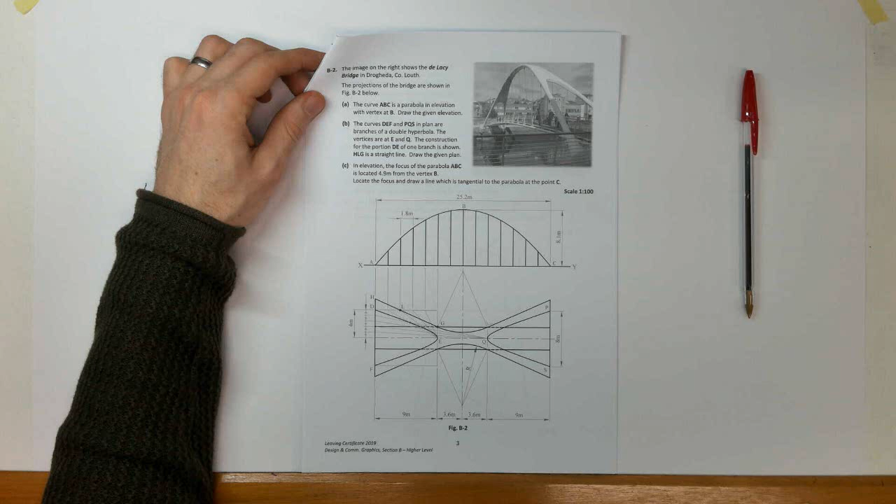Welcome to 2019 higher level, question B2. This is a conics question with links to orthographic projection.

So the image on the right shows the de Lacy Bridge in Drogheda, County Louth. The projections of the bridge are shown here below. The curve ABC is a parabola in elevation with vertex B. Draw the given elevation. Okay, so let's start with that.

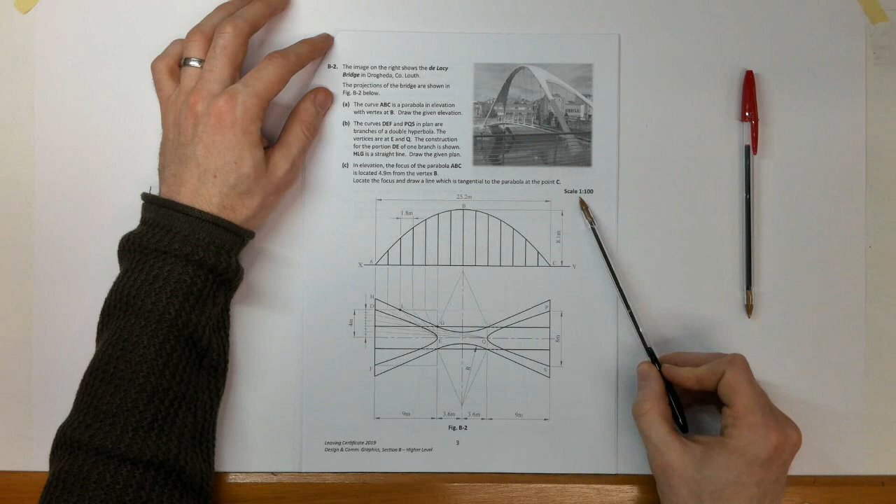All our measurements are given in meters, and we've got scale 1 to 100, so we can convert all of those. And to do them quickly, I'm just going to work out that 8.1 meters is going to be 81 millimeters. So I'm just basically moving the decimal point for all of those.

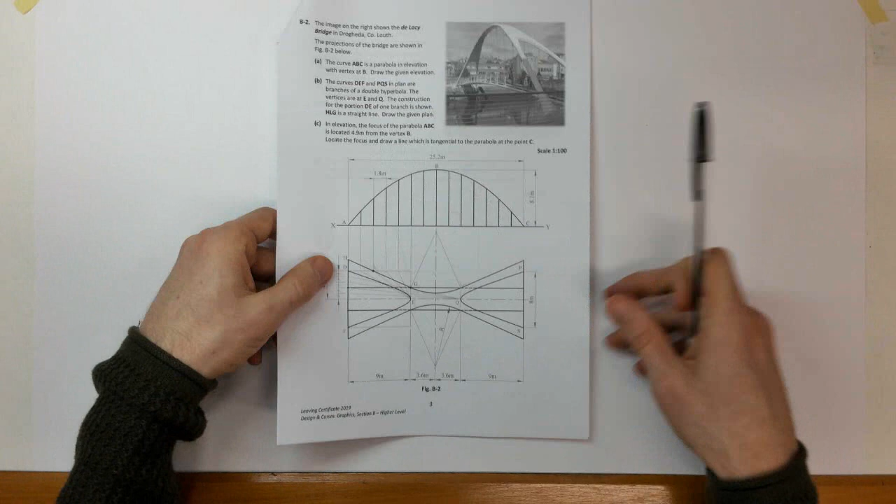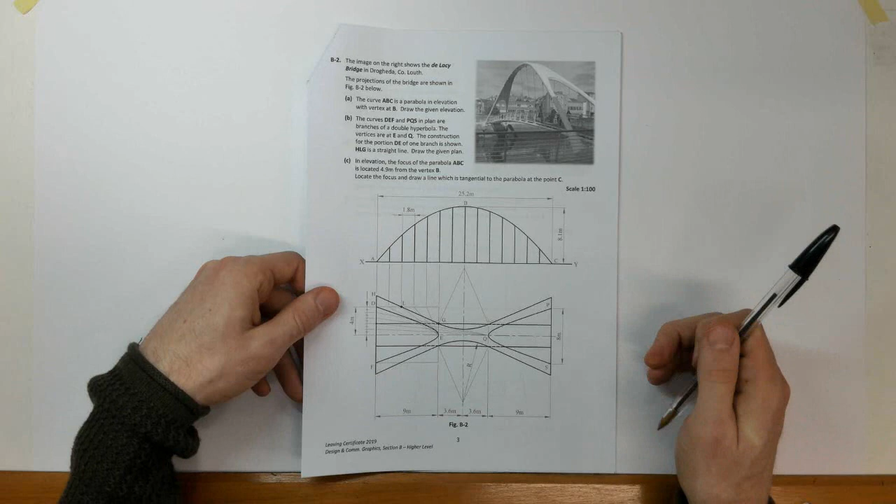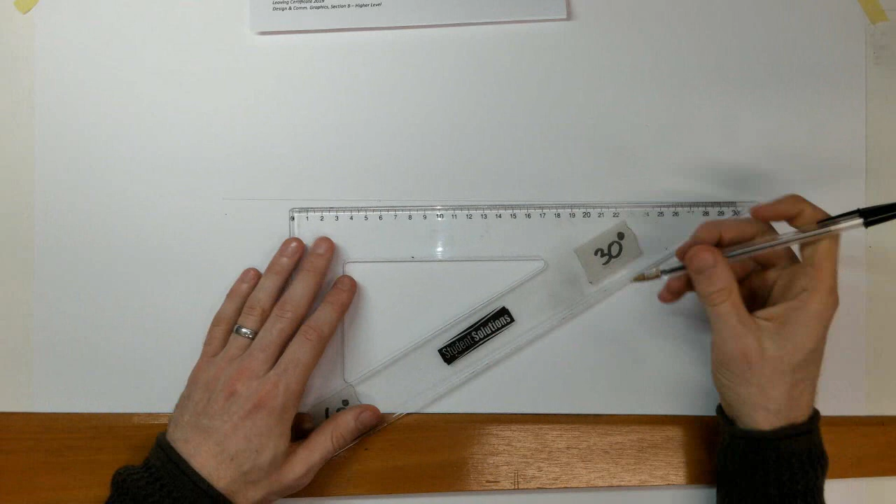Just to start off, we want a rectangle to go around the parabola ABC. So the length is going to be 252 and the height is going to be 81. So XY line. 252. Okay, and a height of 81.

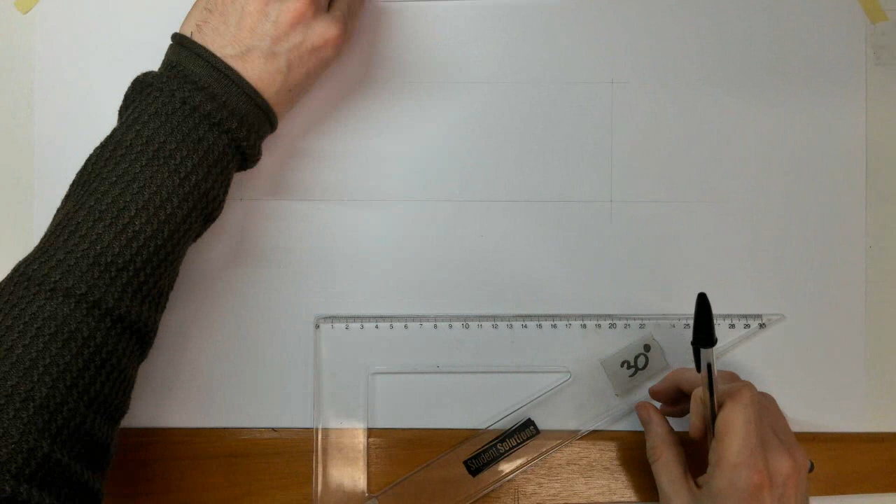And halfway along that then, 252, I'll just bisect it to make life a little bit easier and quicker and more accurate. And that will locate my vertex. So we've got A, B, C.

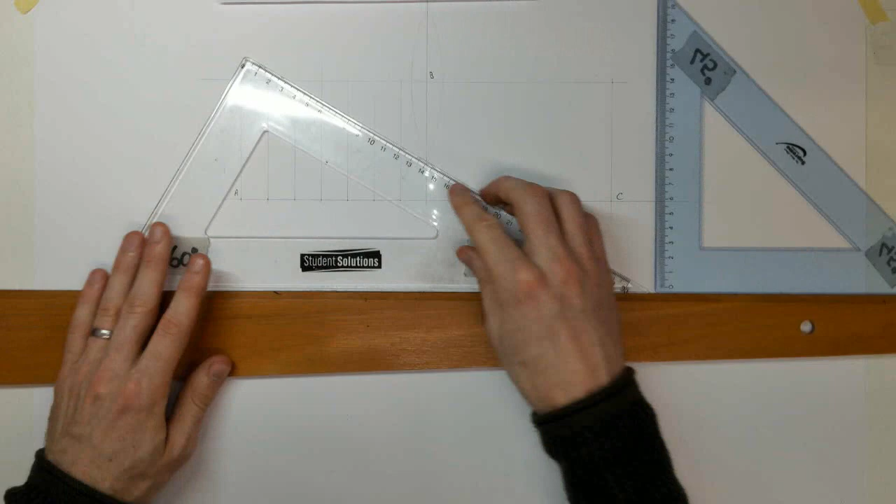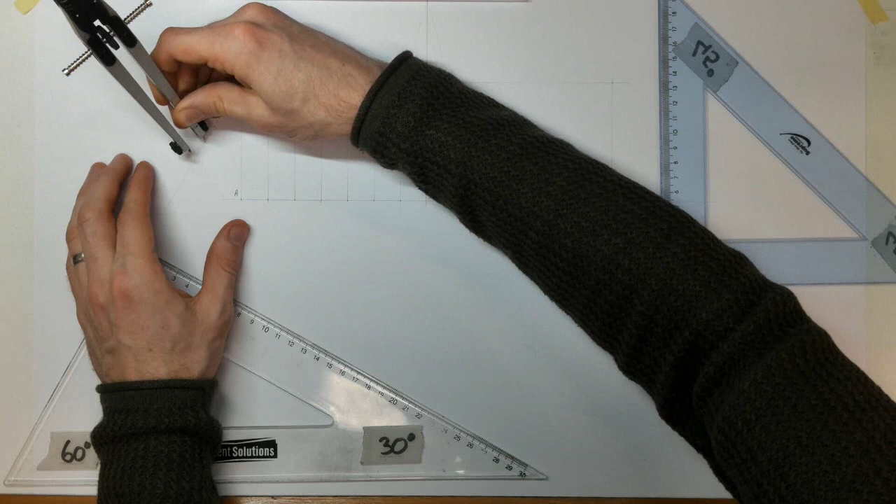Our vertical numbers will be there. Okay, now just divide this side part up into 7 equal parts. Step off 7 times. Drawing back to A.

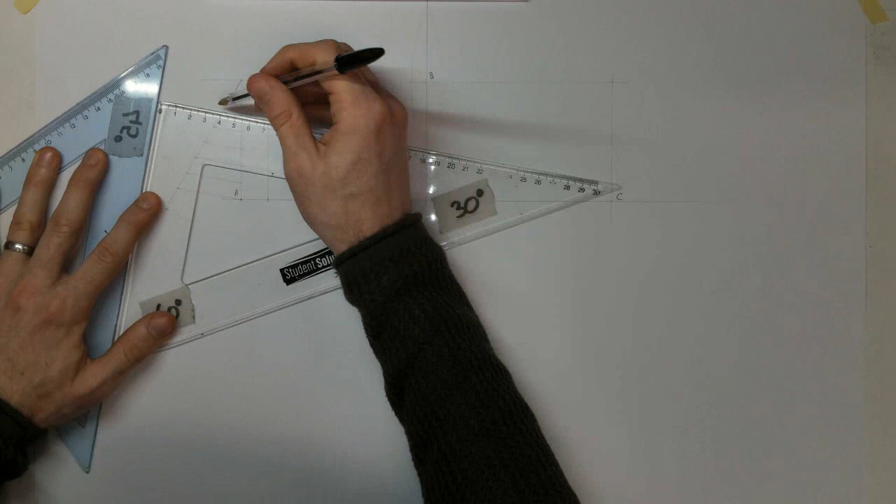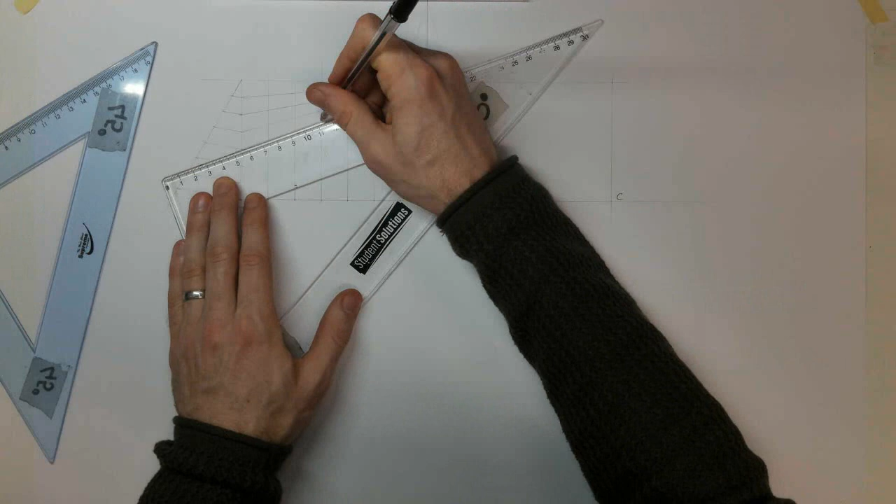And drawing them back up to B then, let's find its points. 2, 3, 4, 5, 6. Okay, so here's my parabola.

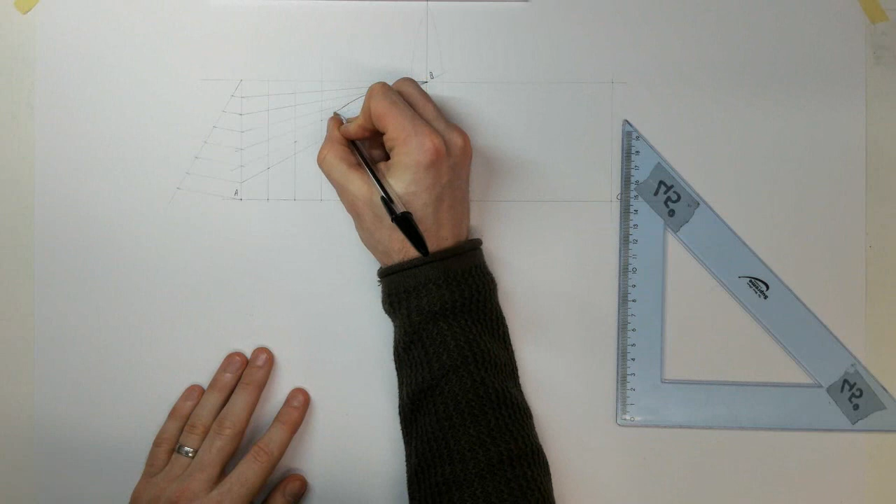Now I could do the same thing all over here again, but a quicker method is to use axial symmetry, so mirror everything across, and that will actually also locate my members there so I don't need to measure 18 all the way across there too. So let's use our axial symmetry.

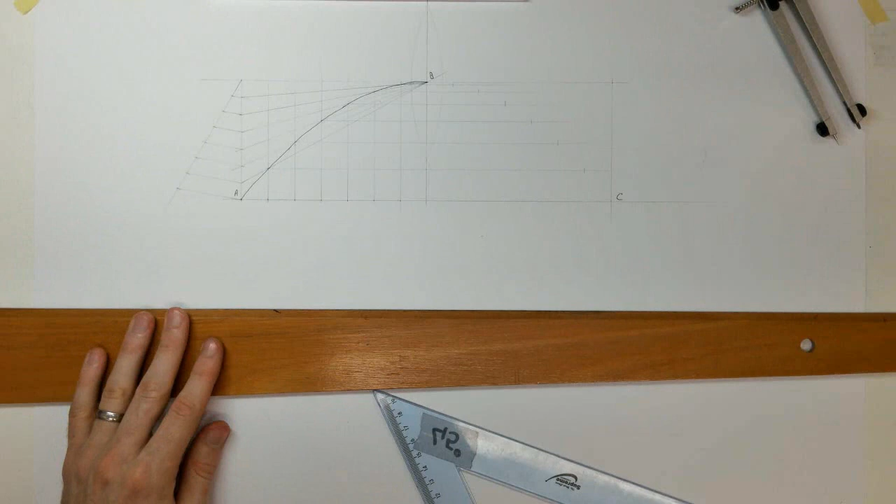I can draw my parabola running up this way also. And heavying my vertical parts.

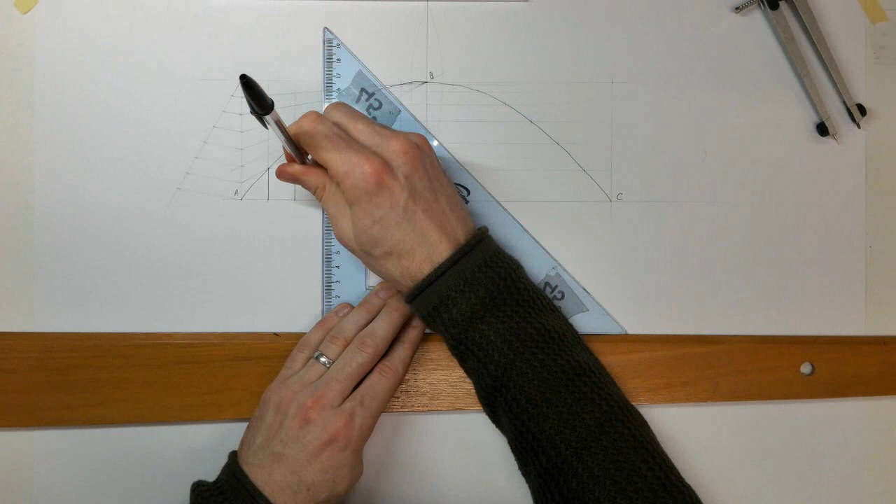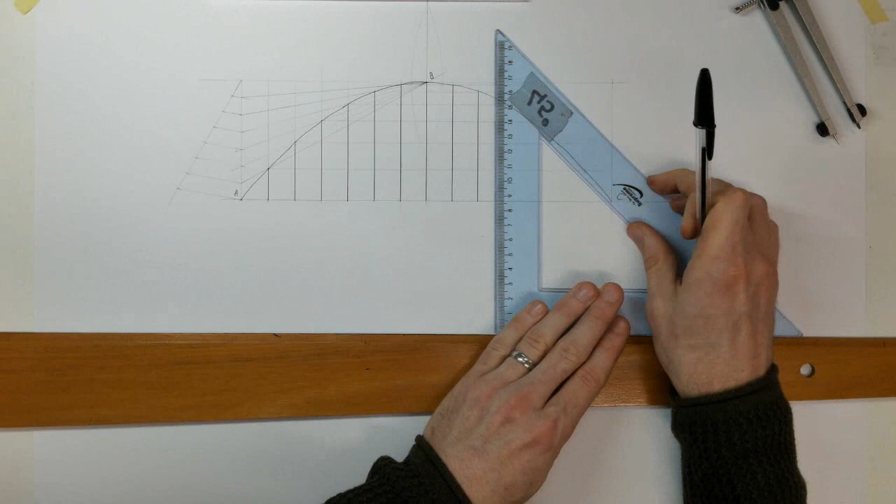That's like a little time saver there in the elevation, just the axial symmetry. It shows with things like that. The more we practice them, the more we will identify them. So that's my elevation. You can take that off.

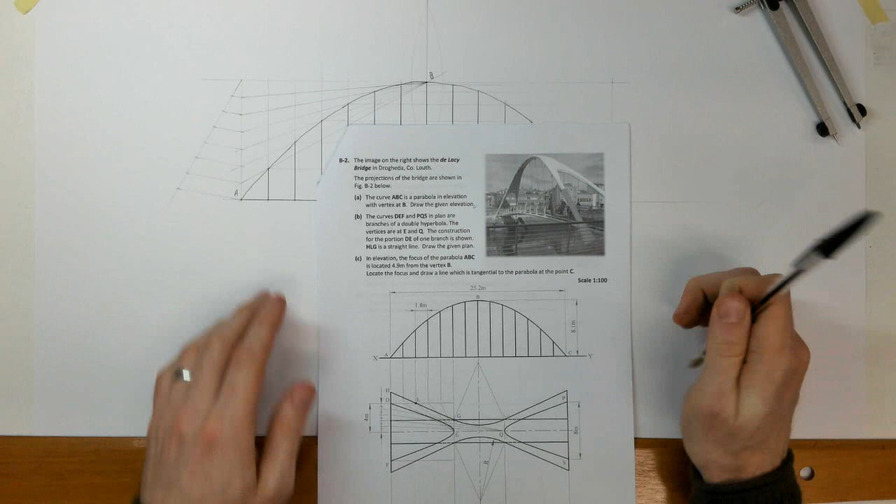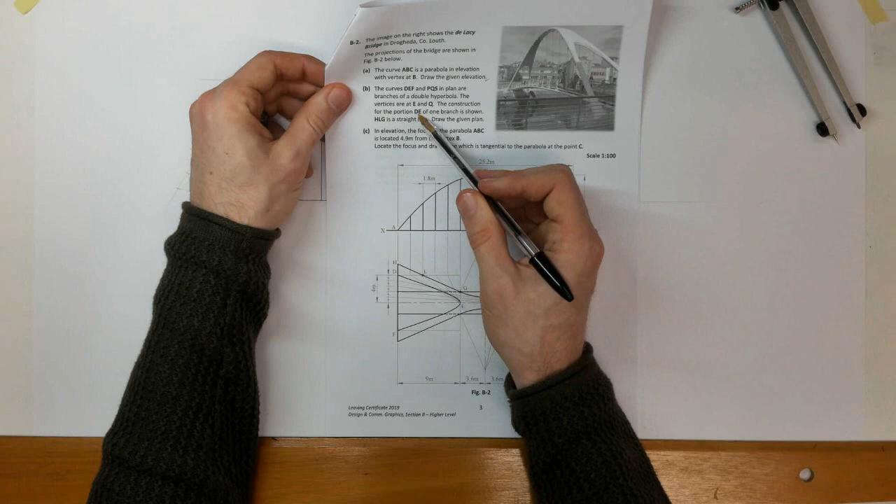So the curves DEF and PQS in plan are branches of a double hyperbola. So DEF and PQS, there are double hyperbola. The vertices are E and Q. So here are vertices. Construction for the portion DE of one branch is shown. So they are telling us how to get the points there on our curve. So that's kind of a great little clue to us.

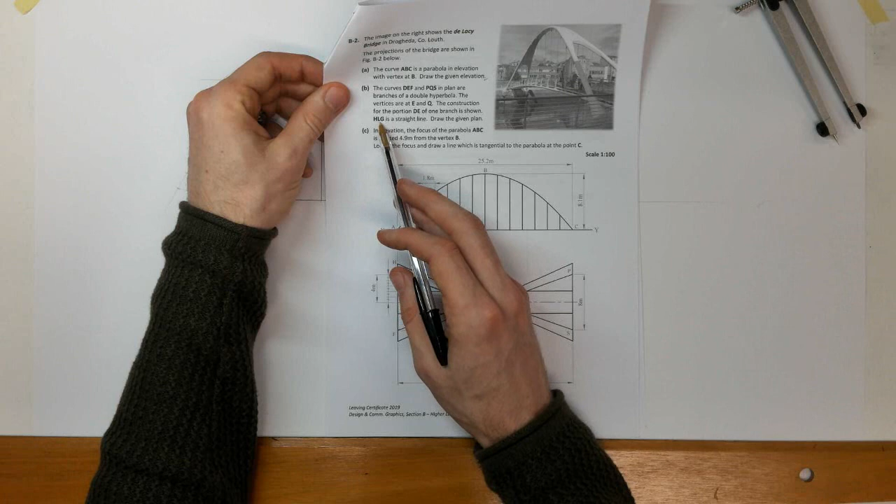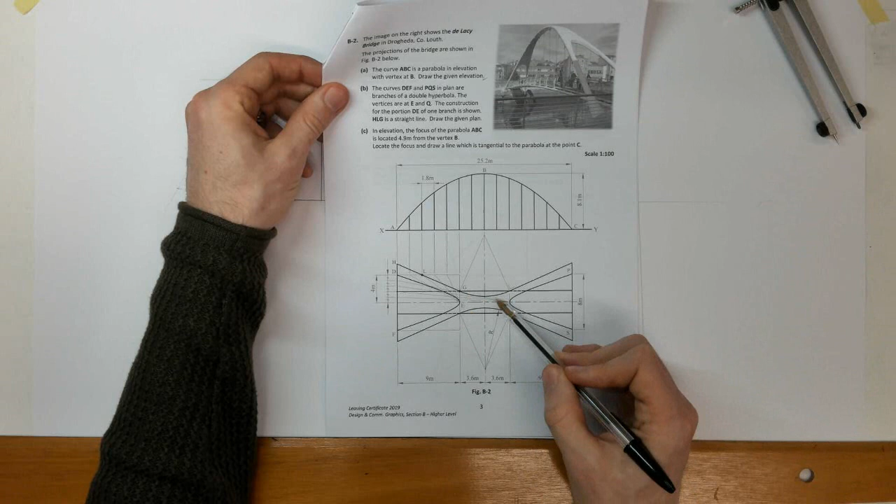HLG is a straight line, and draw the given plan. The reason they're telling us that is it turns into a curve with a center there. That's our radius, and a 90-degree angle there. So they are all tangents to that arc. So H as far as G is a tangent, and so is this line, this line, this line. Okay, so we'll start with our center line, and we can work back from there.

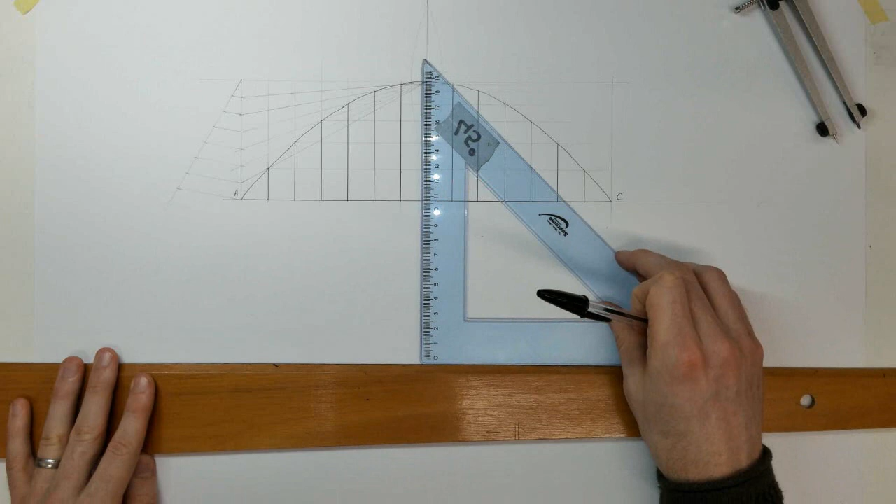Probably draw our double hyperbola to begin with. So I'm going to come down. That'll be fine. Start with the center line to begin with. Okay, and measurements they've given us: 4 meters, so 40, 80. So 40. 80. Should fall down as well.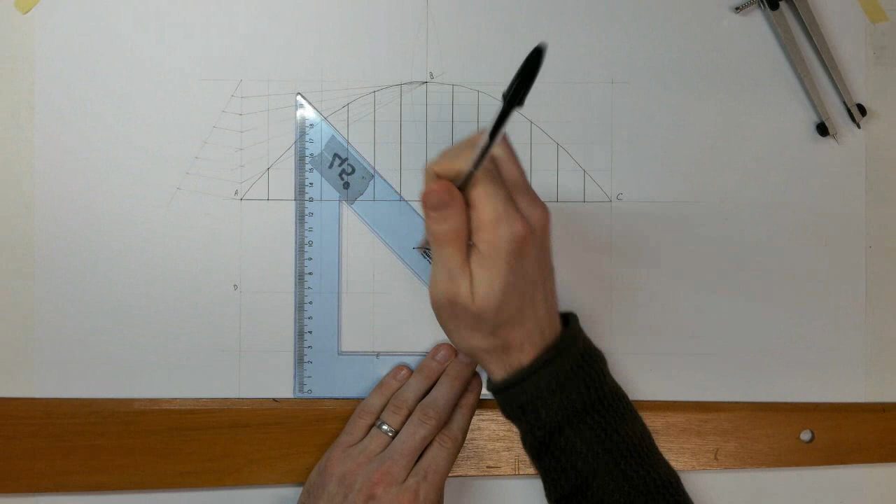Now we have 1, 2, 3, 4, 5. We'll be able to mark them off actually. So first of all, project these down. They're actually in line with each other. So project down our vertical members. So that's our divisions. Okay, and we're joining them all back to E.

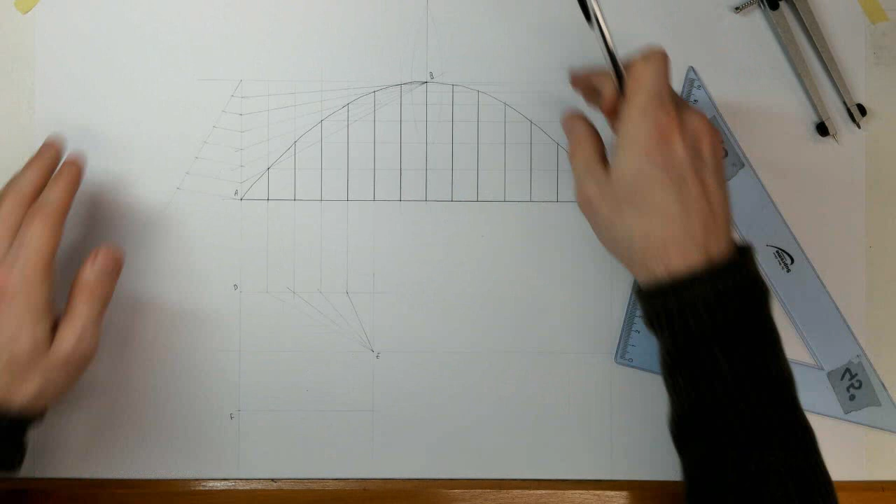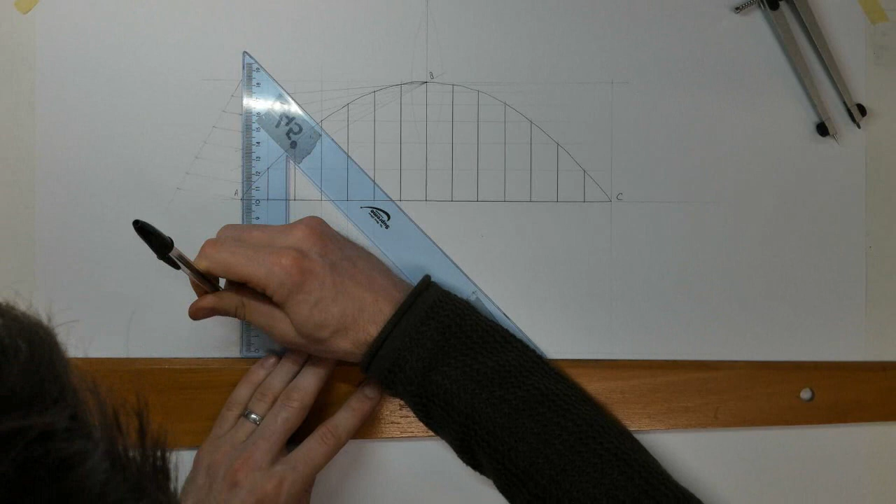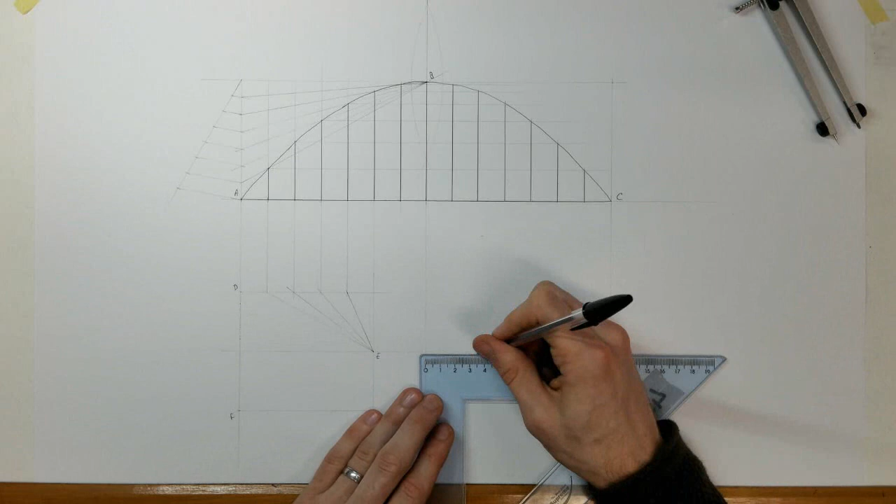Okay, like I said, we have equal divisions here, so there's 5 equal parts, 5 into 40 millimeters, so we're going to go in eighths: 8, 16, 24, 32. And they all now join back to Q, so we need to find Q. So 36 and 36. Put that down the middle, it should be 36, which it is. Measure out 36 again. So that's my Q. Join all of them back.

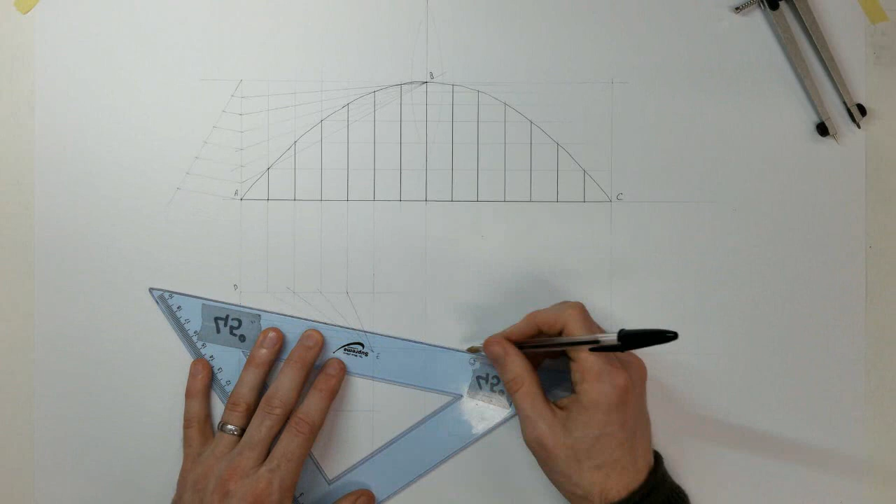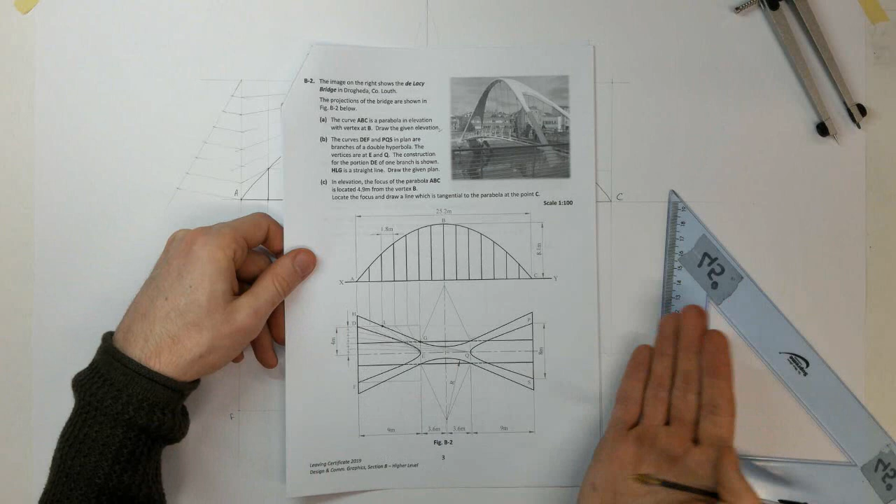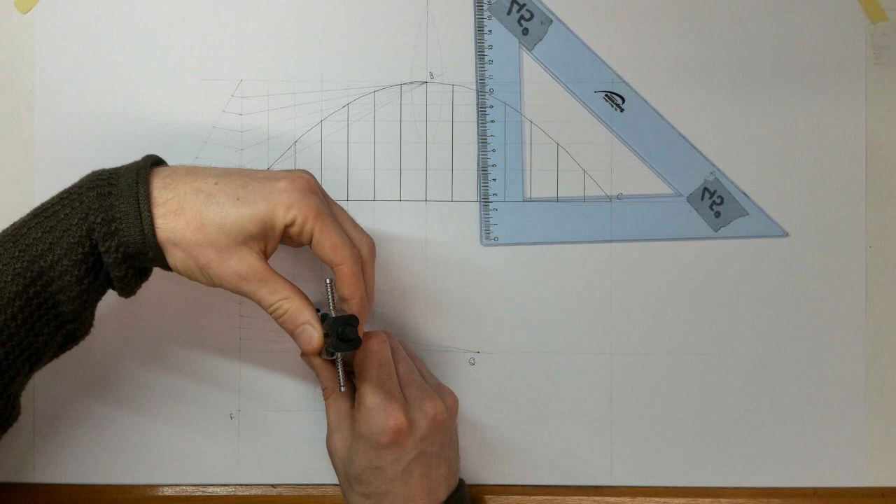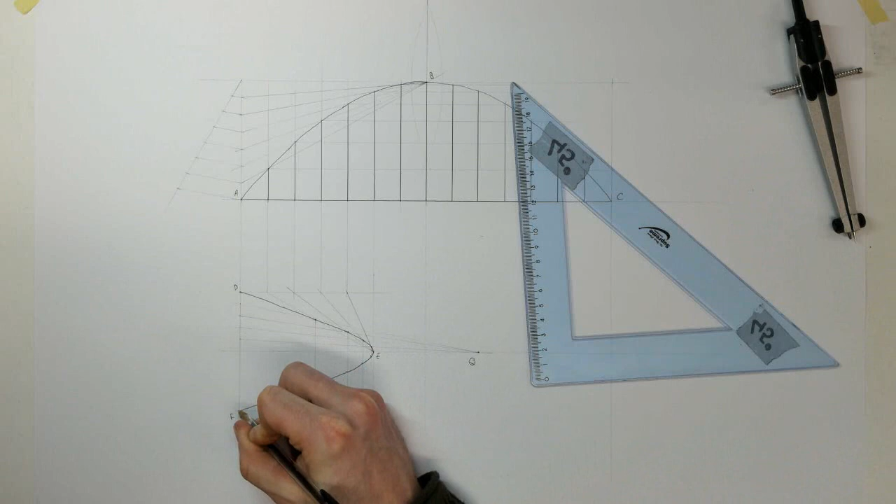Find our points then. So you can see here, this line crossing this line here, there's point 1, point 2, point 3, point 4, back to D. Okay, so let me draw that. Okay, and looking here in our question, we've got our center line, another center line here, so I can actually mirror down, mirror across. So let's mirror downward. Compass. Okay, and mirror all those across this way.

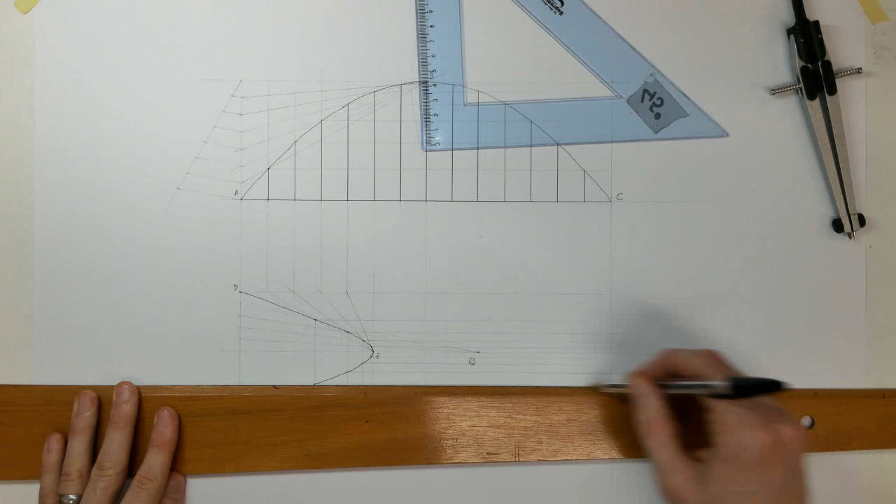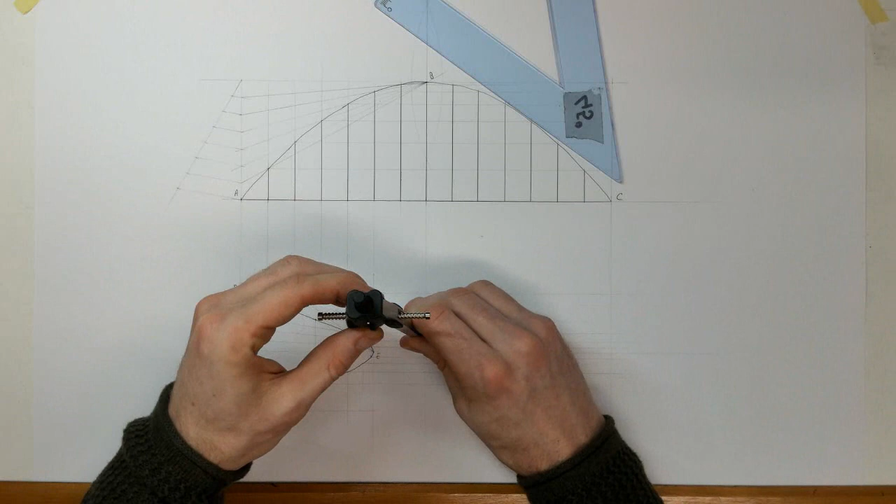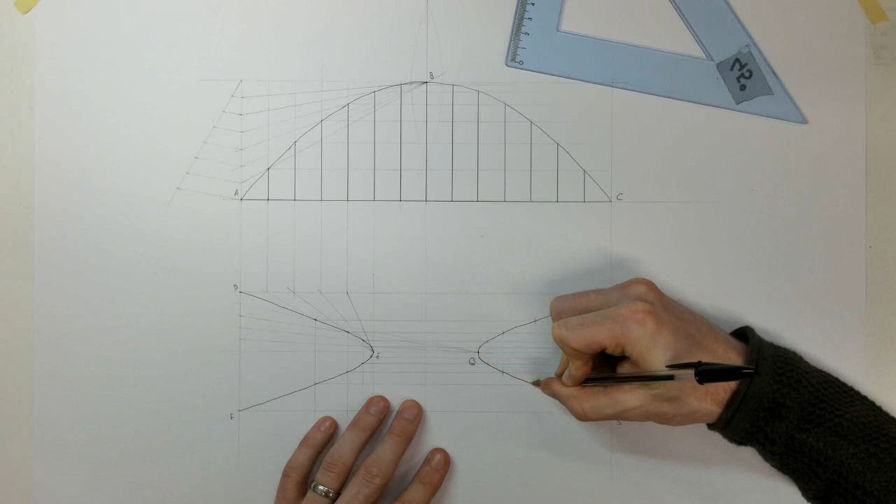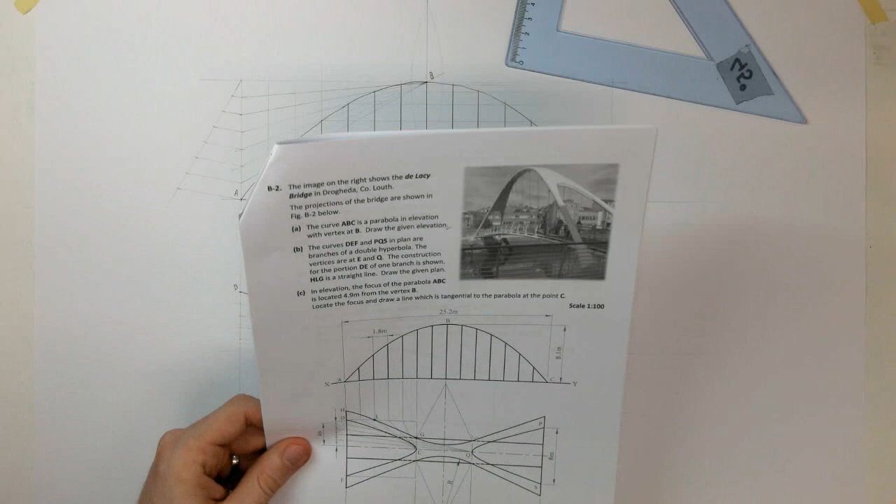Okay, so our time saver here is this point and this point are the same length, so you can swing an arc for both of those at the same time. Like I said earlier, we're always looking for little ways to save time. Okay, so that's our branches of our hyperbola done. Okay, and we're always working in order. Construction of one branch, so it's shown, and then we got a straight line running from H to G. So here is G. Need to mark off our road. So we're going through, so that's going to be G.

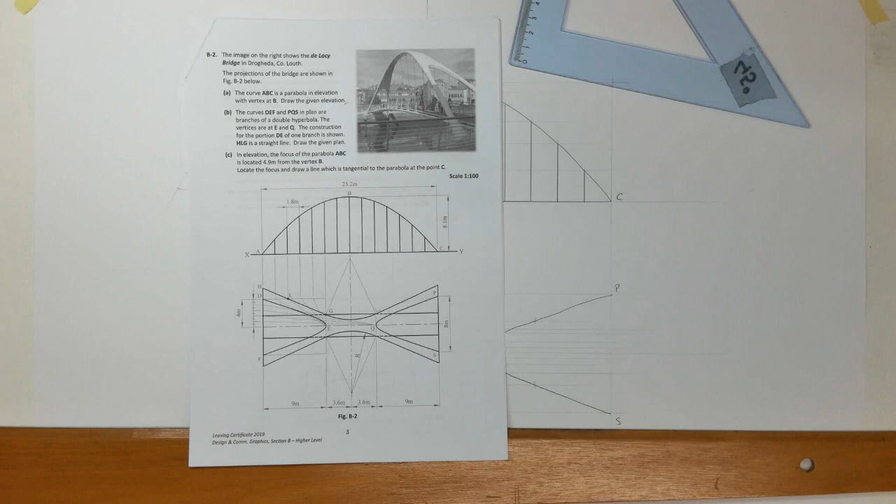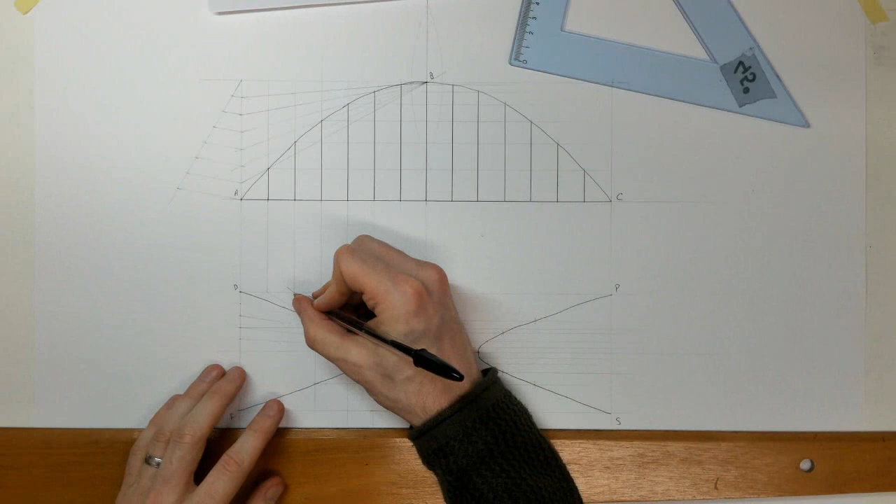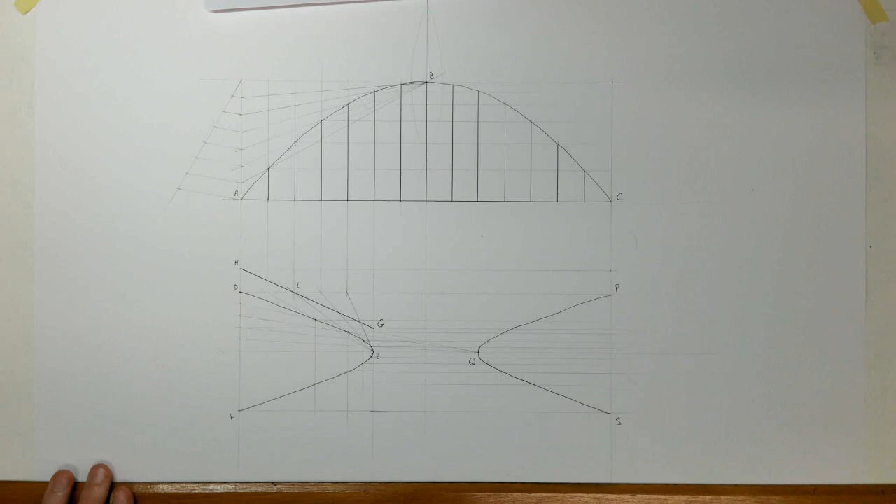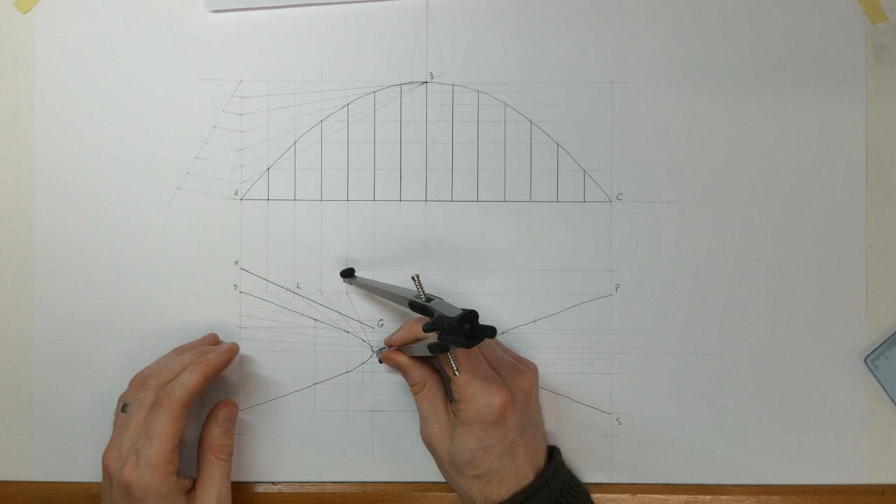So for the position of H, we don't have that distance, but we do know that G goes through L, and that's a point we do have on that rectangle that we've drawn. So here is point L. So we can extend from G through there to find H. So I can actually do that on here and find a point which they haven't actually given us. We can mirror those down also, so the distance from center to H, the same there and the same there. And I can also find its corresponding distance right there.

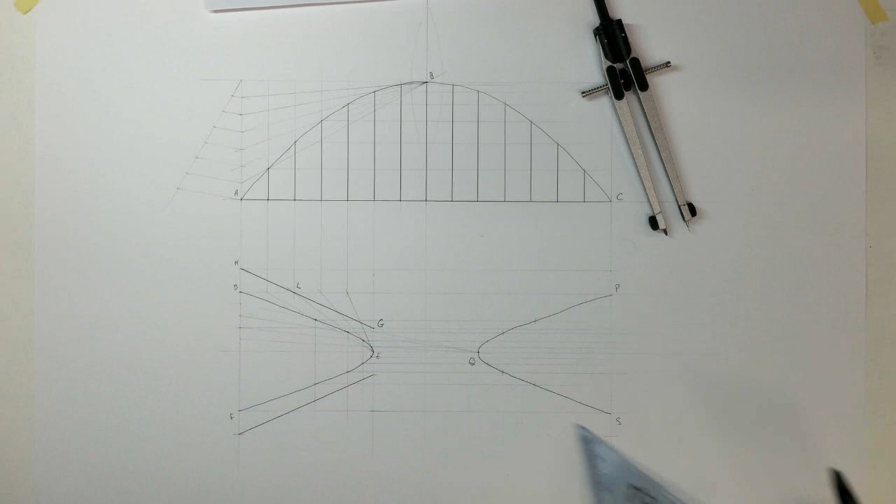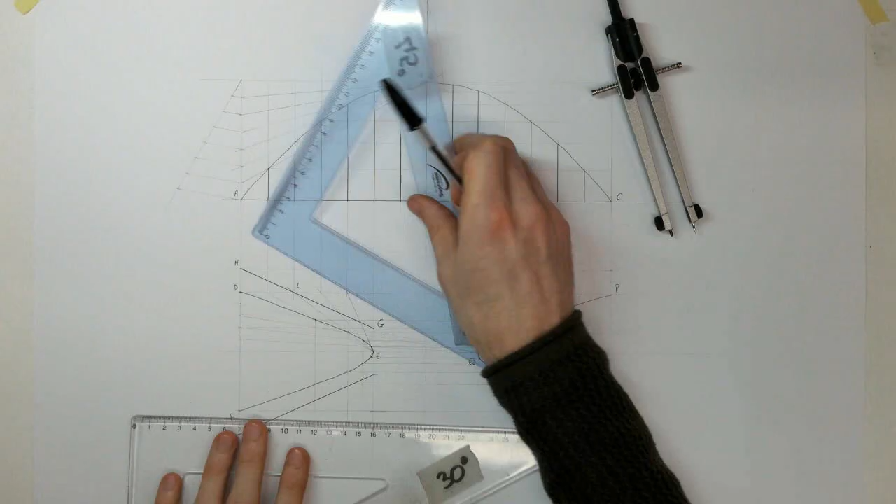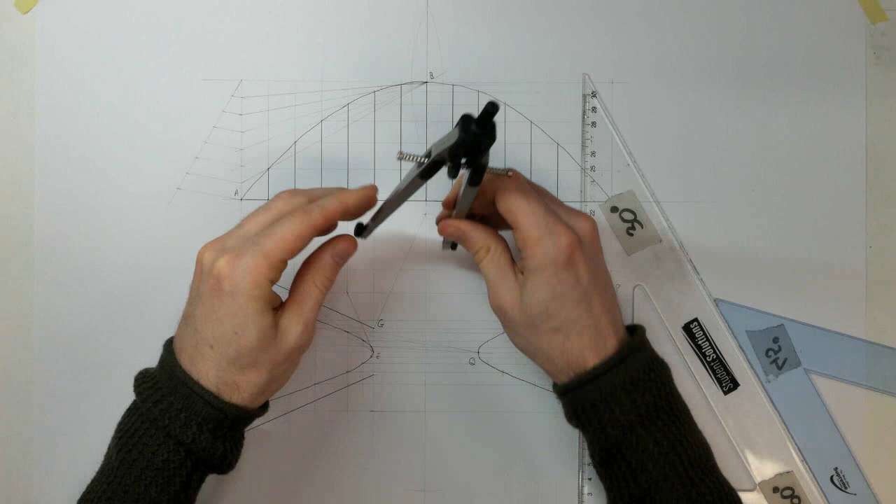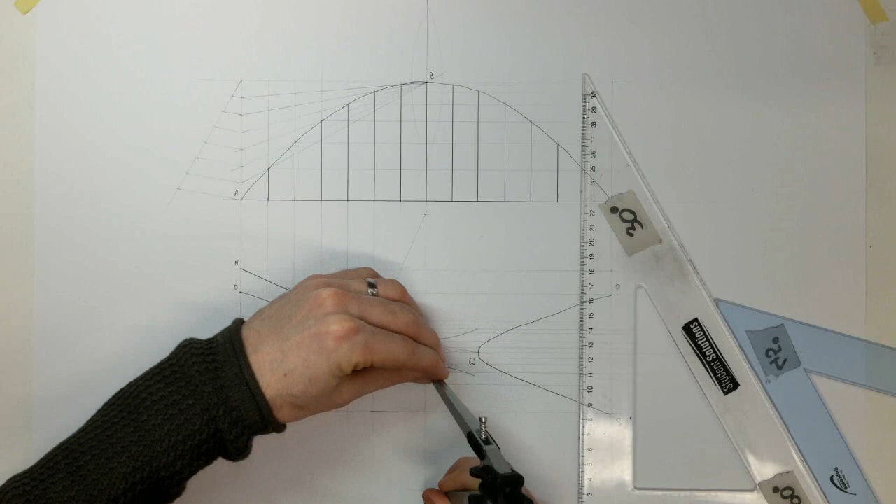I'll draw in those other two sides in a moment, but I'm just going to jump on and find this curve. So I know the curve is down through the center and at 90 degrees to these tangential lines as I mentioned. So let's do sliding set squares. That's my center there, and actually mirror that through as well. It's going to be the same on both sides. So all time savers again. Let's draw our curve. Established here. Should be same as that. I need to actually find where that ends, so bring that distance across. That will allow me now to draw the other tangents.

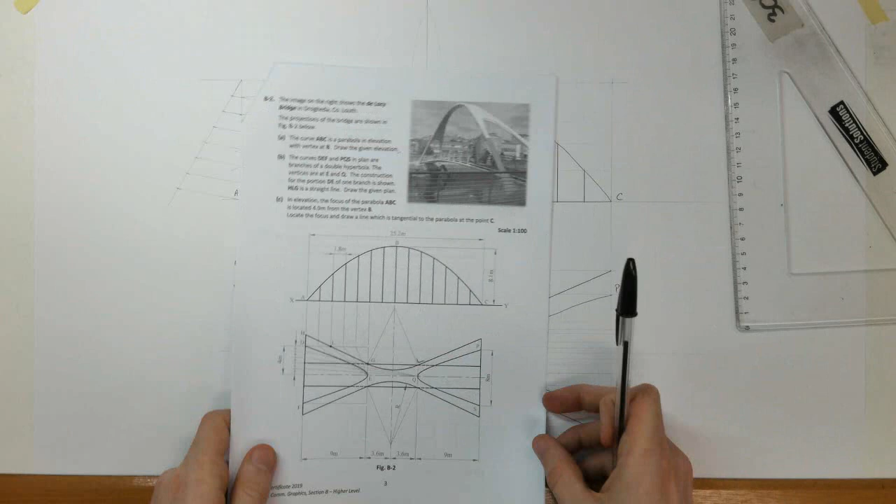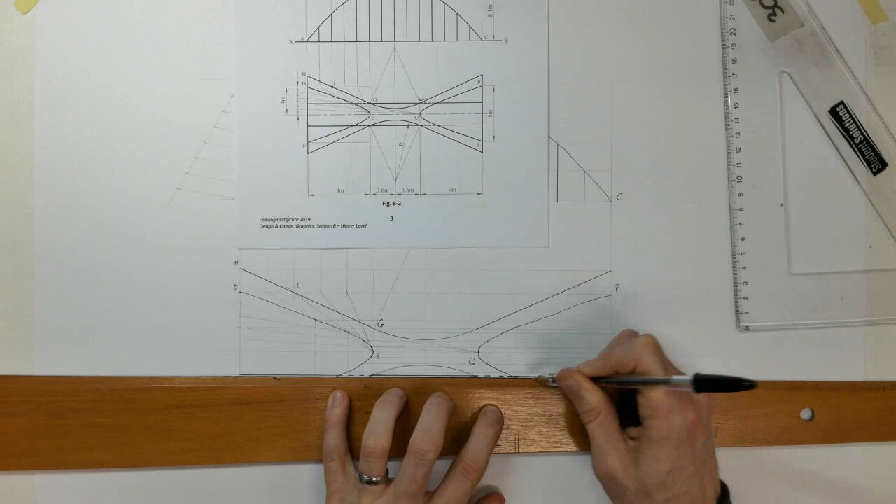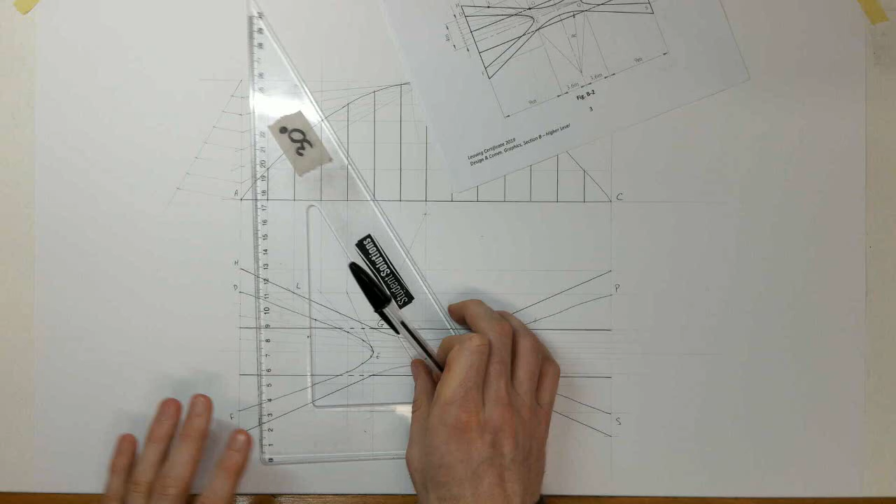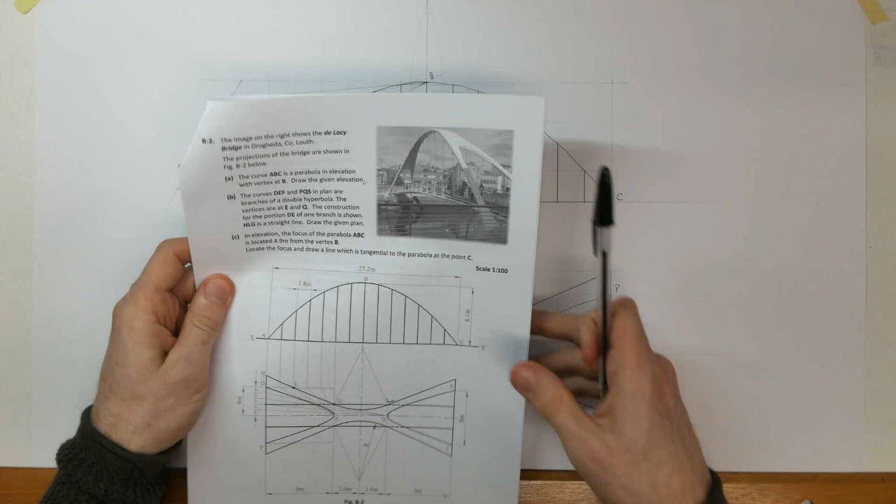Okay, so this now is the roadway. So I have the position of the roadway here at G and also in that point that we just used. So heavy line. Dashed here again, and heavy line. Same up with G. Let's finish off those edges heavy. Outermost points. Okay. I think that is everything in plan completed.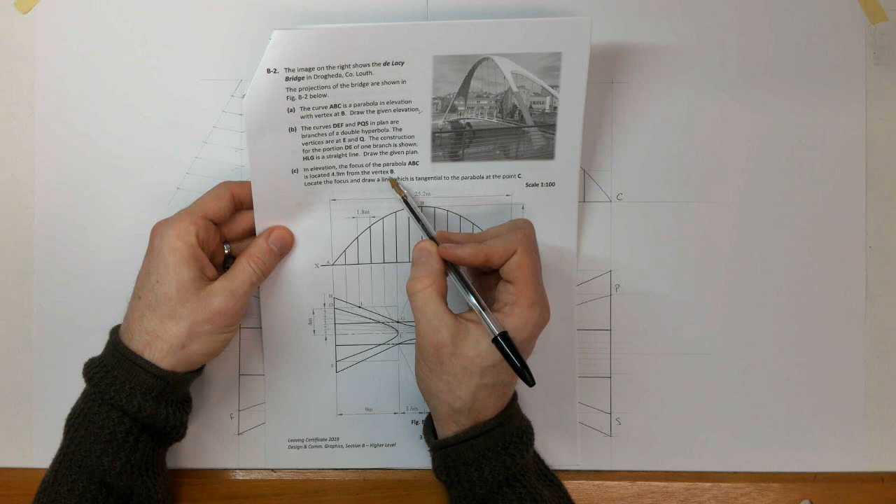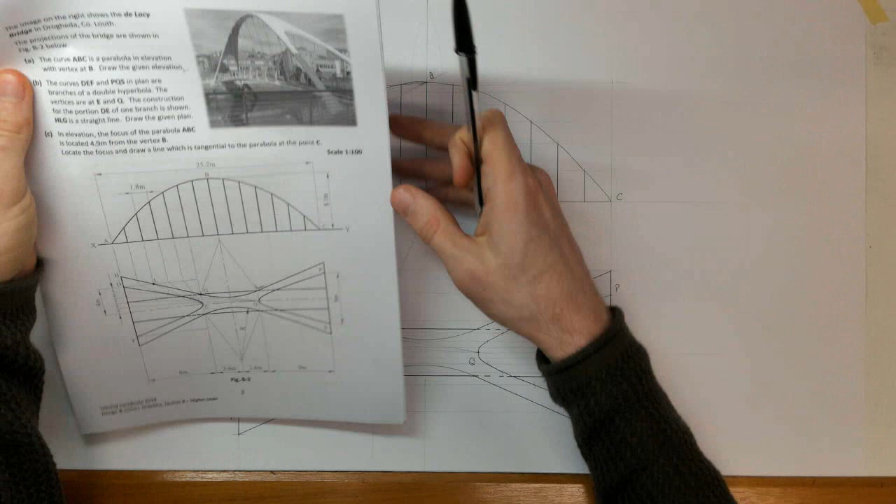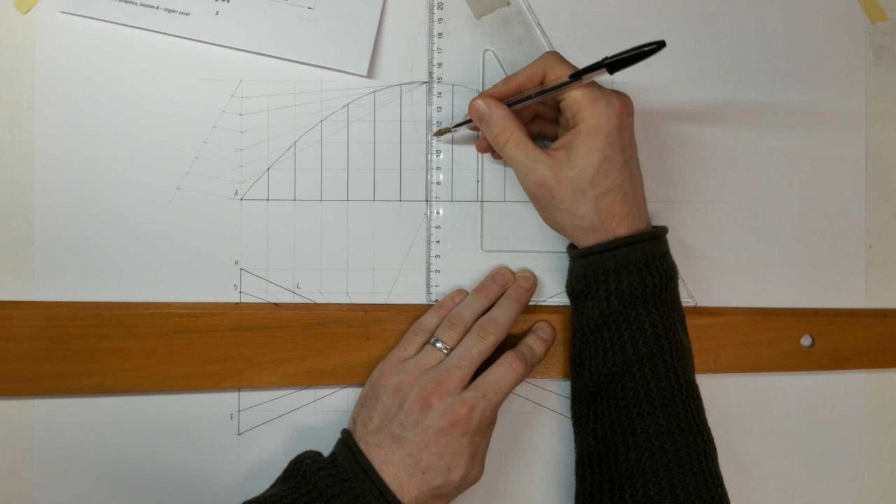Yep. So last one, in elevation, the focus of the parabola ABC is located 4.9 meters from the vertex B. So in the elevation, here's our vertex B. So we need to find a focus in here. Okay, our directrix would be out there somewhere, exactly the same distance out, because the eccentricity of a parabola is 1. Locate the focus and draw a line which is tangential to the parabola at point C. Okay, so let's locate the focus first. It's going to be 49 from B. I'm just using this part of my set square to measure it, because my 0 was gone a bit faded there, but that's 49 mil I'm measuring there to find my focus.

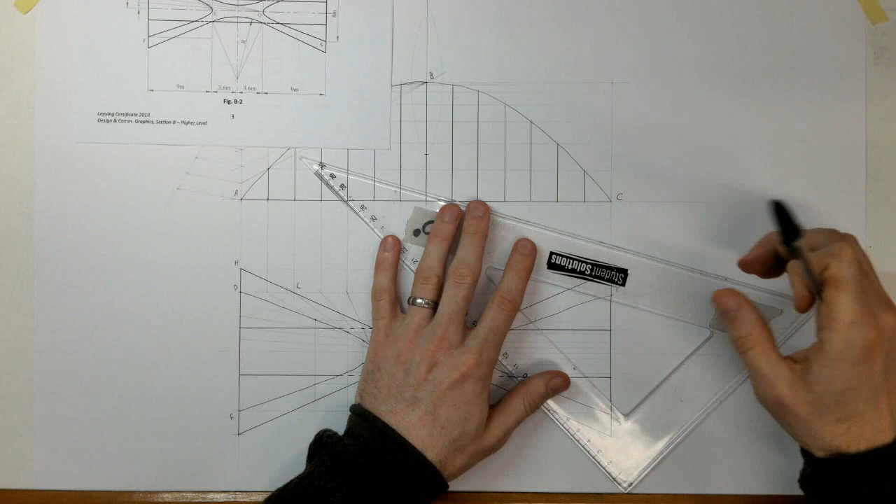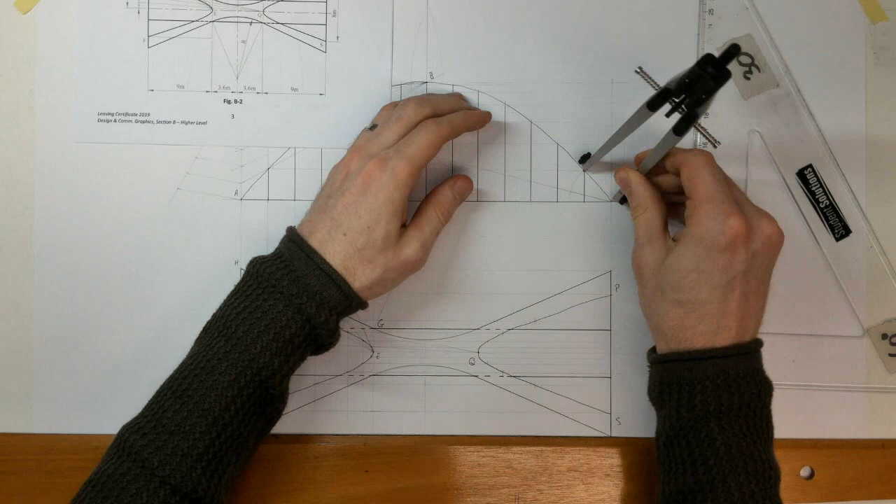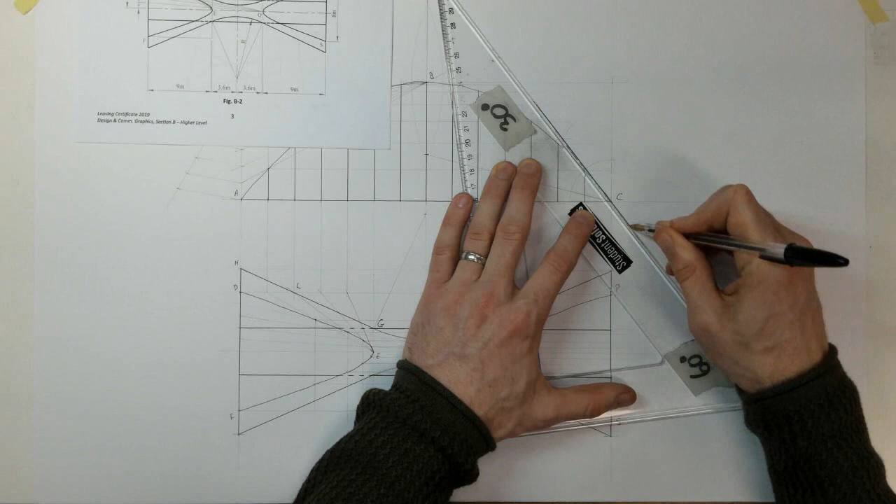And then for a parabola, okay, PF over PD is equal to 1. So what I'm going to do is join my focus to my point C. My directrix will be out there, so what I'm going to do is bisect that angle. So swing an arc, swing 2 arcs the same length, radius, and draw my tangent then in that position. So that's my focus, joined it back, bisect that angle, and that found my tangent there. Okay, so that's the solution there to B2 in 2019.